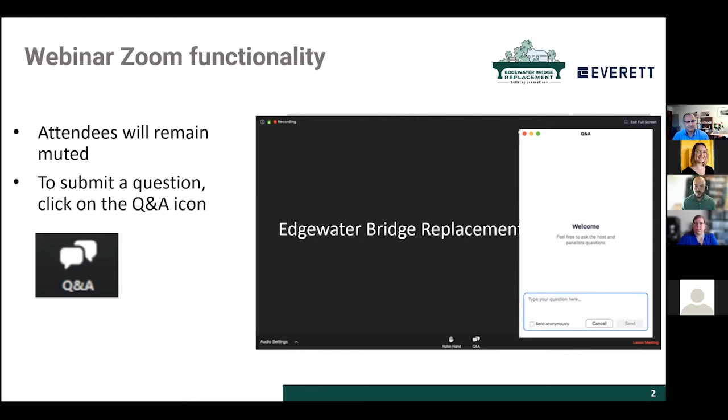In addition to these folks, we have a good number of project staff from either this project or from adjoining projects here with us who can answer questions.

The Edgewater Bridge project is a fairly elaborate project in and of itself, but it doesn't happen in a vacuum. There are other things happening along the Mukilteo Boulevard corridor, and this project is in coordination with them. We have folks from those teams, projects, and disciplines here to answer questions should they arise.

With that, I think we can turn it over to Gail to give us a project overview.

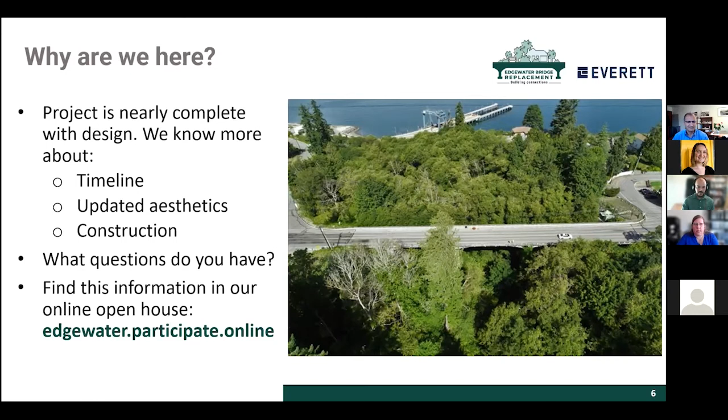The City of Everett is investing in our multimodal transportation by widening Edgewater Bridge to add bicycle lanes and more comfortable pedestrian sidewalks. The bridge is a vital link along Mukilteo Boulevard between the cities of Everett and Mukilteo.

Edgewater Bridge is one of 3 bridges along the boulevard within the City of Everett, all of which were recognized to have seismic vulnerabilities. The city is investing in this stretch of infrastructure to strengthen the corridor as well as mitigate any potential isolation during a major seismic event.

The Maple Heights Bridge seismic retrofit project was completed last year, and as funding becomes available, Merrill and Ring Creek Bridge will also be replaced.

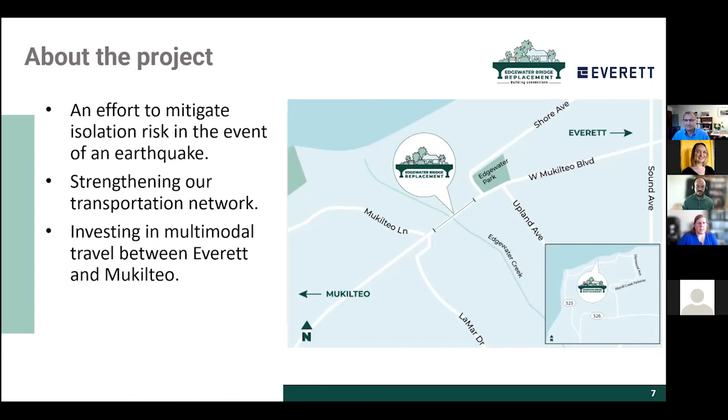Edgewater Bridge was built in 1946. Though it is considered safe, it has reached the end of its useful life. The bridge is posted for reduced weight restrictions, and as was mentioned previously, is vulnerable during a major seismic event. Most of you will agree the sidewalks are too narrow for comfortable walking, and there are no bicycle lanes.

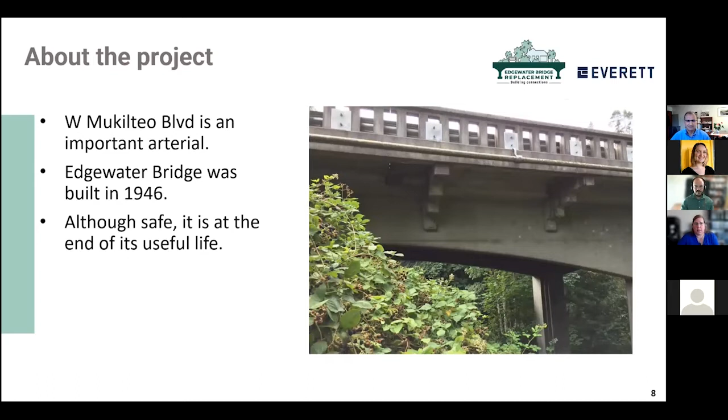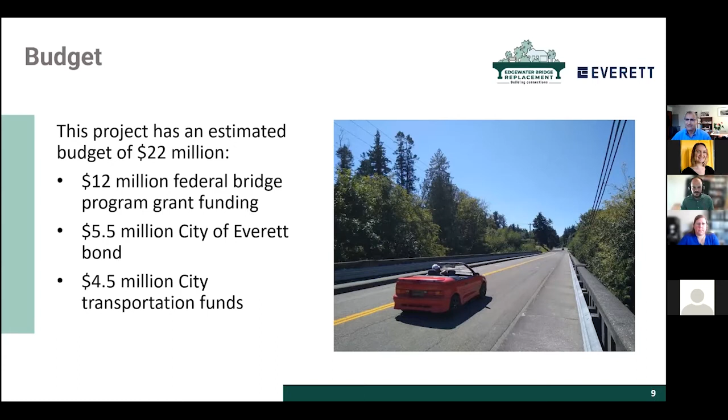And now I will hand this over to Cash. Thank you so much, Gail. Appreciate that. And good evening, everyone.

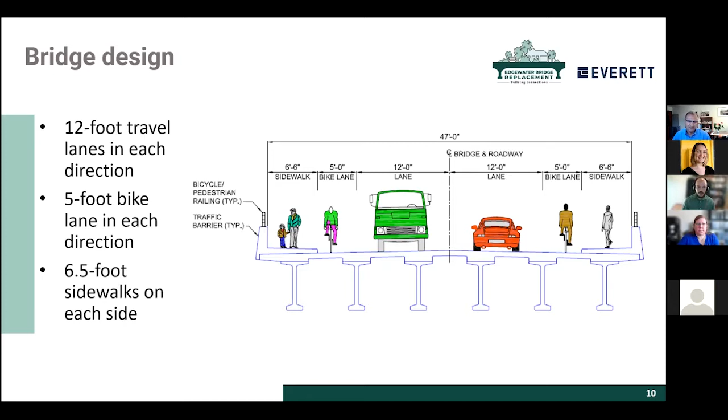The substructure of the bridge is composed of the main piers. Interior piers are founded on shafts and columns. The shafts of the interior piers are 10 foot wide and 10 foot in diameter, round shafts with 5 foot columns on top of them. The deep foundation for the abutments are composed of 6 foot shafts.

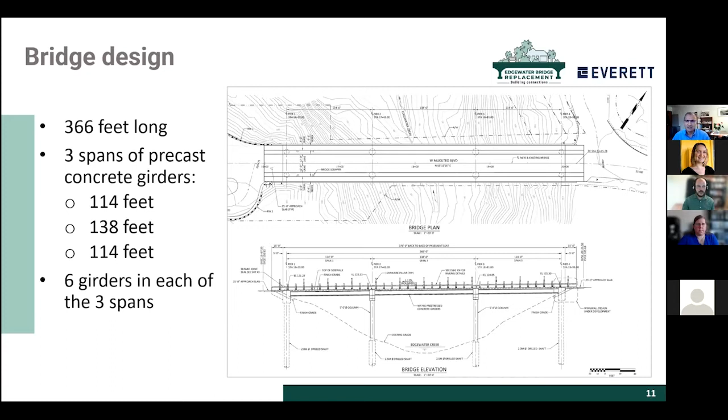Again, through an earlier outreach to the community, these functional aesthetic features were polled, and I will pass the baton to Nicholas to talk about more on that aspect of polling and public outreach.

Thanks, Kash. As Kash mentioned, we came out to the community about this time last year with a participate-online open house, asking for community input on what the aesthetics of the bridge could look like. There were 3 different designs, different styles of the railing, the luminaires or light poles, and the gateway features at both ends.

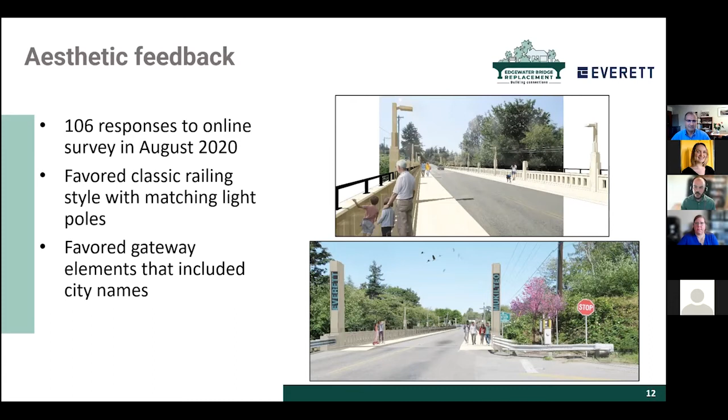I think now we will kick it back to Gail to talk about project timeline. Thanks, Nicholas. Since we last reached out a year ago, we have made great progress in the bridge design. We anticipate wrapping up design and submitting the project to WashDOT for their review late this fall.

Once we have permission, we will advertise and open bids early next year. After the contractor is on board and contracts are signed, construction should start in late spring. The bridge will remain open until school is out in June. Once closed, the road will remain closed for approximately 12 months. We anticipate the bridge will open summer of 2023 and the contractor will finish construction and demobilize.

Before the bridge contractor is on board, the city will begin a two-phase sewer project. The first phase may overlap the start of the bridge site work but will not interfere with the project. Once the bridge is finished, the second phase of the sewer project will remobilize and finish. This will be followed by construction of the newly designed Edgewater Park, completed in 2024. Next slide, please.

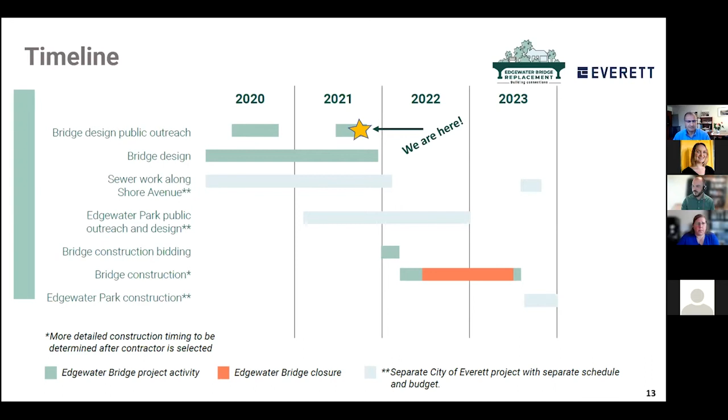Through design, we anticipate some basic details about construction, but we will know more about the contractor's means and methods once they are on board. Edgewater Bridge will be closed from mid-June 2022 for approximately 12 months with a pedestrian crossing path available. There is no economically feasible way to keep the bridge partially open while we rebuild it.

The west end of Edgewater Park will be used as a staging area, along with the intersections immediately adjacent on either side of the bridge. To provide access to the site and have room to operate the cranes and swing the girders into place, it will be necessary to remove trees and brush.

This will include the 5 trees at the corner of Shore Avenue and Mukilteo Boulevard. We will be following all guidelines established under the NEPA and SEPA permitting requirements, and we will be planting approximately 250 trees and a large variety of shrubs during the site restoration.

These replacement trees and shrubs are additional to the trees and shrubs that will be planted during the park redesign. There will be a need to have crew parking on both sides of the bridge since the work platforms adjacent to the bridge will not connect.

On the west side, crews will need to park along West Mukilteo Boulevard between Surlock Lane and the bridge work zone. Construction vehicles will use the portion of Lamar Drive that parallels Mukilteo Boulevard to enter and leave the work zone. We will also be realigning the east end of Lamar Drive, along with adding a retaining wall and installing new drainage.

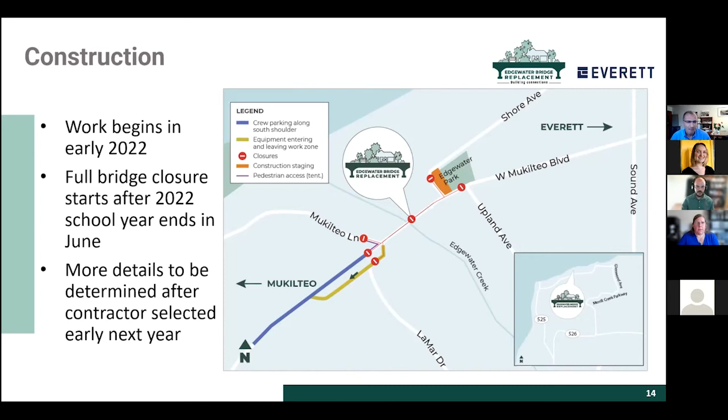Thank you, Gail. Now we would like to talk about the detour routes for the project. We analyzed travel times to provide estimates of the length of the detours for this project. During the morning and evening peak traffic hours, we expect drivers to have their route travel times extended by 5 to 15 minutes, depending on which route they are taking.

As we have demonstrated on this exhibit here, we'd like to mention that if we want to go from point 4 to point 5 on the exhibit, it'll take approximately 23 minutes through the detour. Please refer to the online open house for more detailed information on the general detour travel times. Next slide, please.

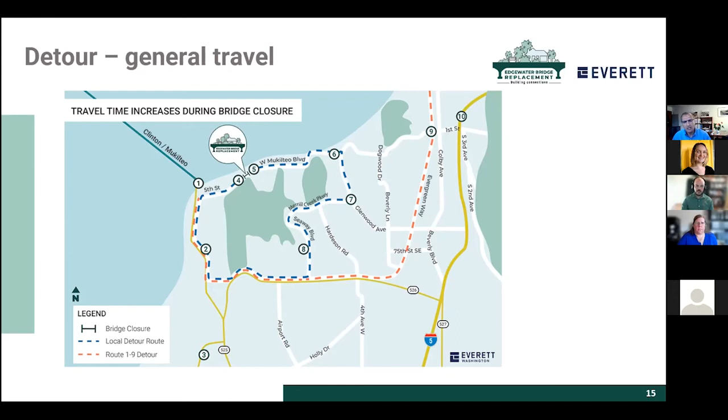Also, regarding the travel times to the schools, as far as school travel is concerned, we mapped the increased travel times for nearby schools. We found that the travel times will be increased by no more than 15 minutes with the routes shown here on the exhibit.

Furthermore, the city and the design team reached out to the school district. After our talks with the school district, we adjusted our construction schedule so that we do not close the bridge until the end of the 21-22 school year. The detour will be in place for the entire 22-23 school year.

Again, please visit our online open house for more detailed information regarding any travel time during this detour phase of the project. Next slide, please.

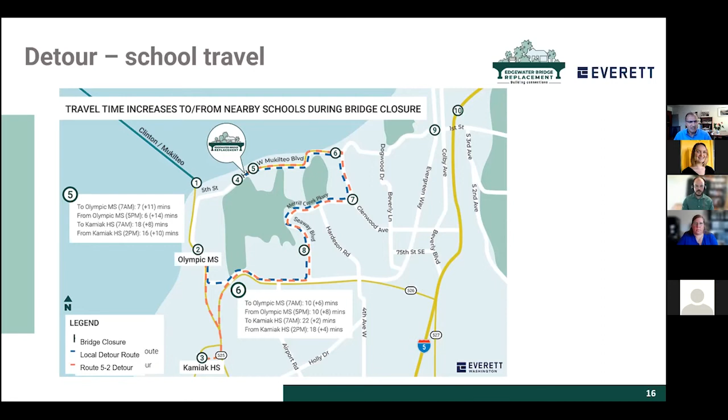Now I will pass the baton back to Gail. Thanks, Cash. As noted in the timeline, there are several other projects in the vicinity of the bridge. The first project will relocate an aged sewer pipeline system located along Edgewater Creek. This project includes installing a new pipe along Shore Avenue and a lift station.

Phase 1 of the sewer project, installation of the force main pipe, as well as the relocation and installation of needed equipment, begins before the bridge project starts. Installation of the force main pipe may overlap the start of the bridge site work, but trenching is anticipated to be further down Shore Ave and will not interfere with the bridge project.

Installation of the permanent pumps and electrical system to complete the project will occur in phase 2. The equipment shown in the picture will remain in place once phase 2 is completed.

The City of Everett's Parks Department is using the partial closure of the park as an opportunity to undertake a new park design. We don't have a timeline for the public outreach or construction for that project at this time.

The City of Mukilteo also has upgrades planned for 5th Street, otherwise known as Mukilteo Boulevard, to improve bicycle and pedestrian safety along the corridor. They also have an online open house, which will remain open until September 8th.

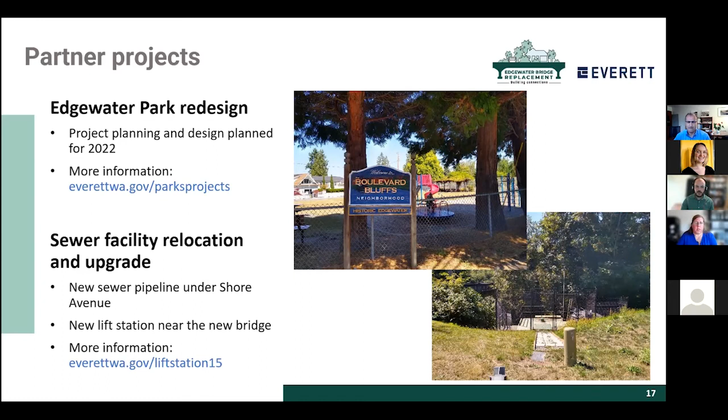The next steps visible to the public will start in spring of 2022, when the contractor begins to mobilize and start some of the necessary site work that will take place before the bridge closure. Once we get close to the start of construction, we will send notifications out. As we approach the bridge closure, we will again send notifications out along with advance warning signs being installed.

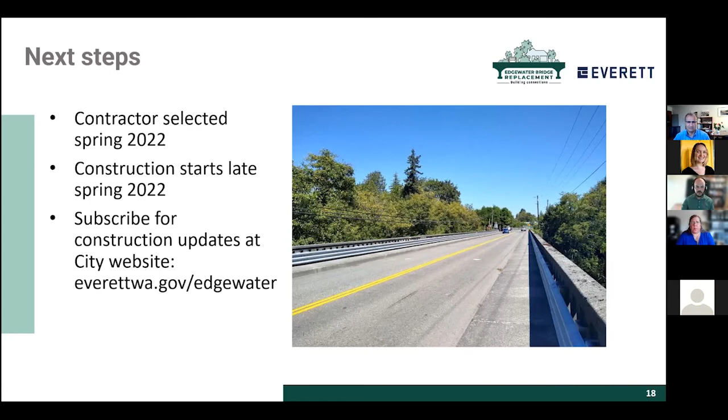Expect the bridge closure to begin once school is out for the 2021-2022 school year next June. Now I'm going to hand this over to Nicholas to help facilitate questions. Thanks, Gail. Yep, so that is an overview of where we're at with the project.

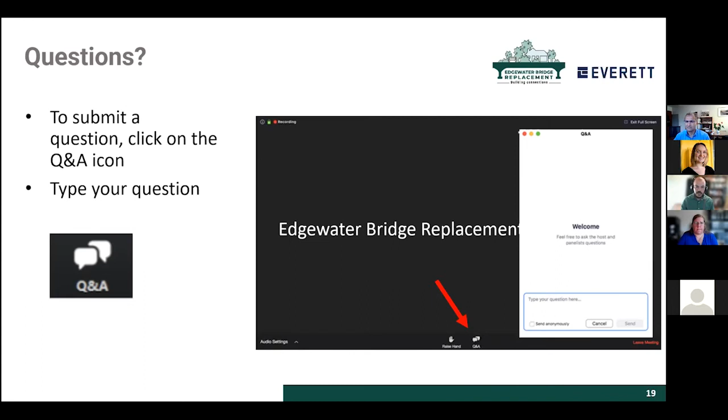As a couple of people have mentioned, we have an online open house running right now, which you can find here on the right at edgewater.participate.online. It has more in-depth information about the project. If you have a certain route you travel frequently and you're wondering about your increase in travel time, we have tables on that website showing what you might expect from that detour.

Gail, we do have one question for you. Someone notes the many pedestrians that cross the bridge daily and is wondering, would it be possible to build a temporary trail down to the creek and up the other side? Many people walk over the bridge to the beach area daily, and there's an old trail there that could be extended to the other side to facilitate pedestrian crossing during the closure.

There will be no pedestrian access from one side of the project to the other. Due to safety concerns, the city will not be providing a path down the ravine. We tentatively plan to provide access along the closed portion of Mukilteo Boulevard and Mukilteo Lane on the Mukilteo side, to allow pedestrians and bicyclists to access Mount Baker Crossing. But again, for safety reasons, we will not be providing or upgrading a trail through the ravine.

We have another question about budget. As you mentioned, the project is currently on budget, but should there be cost overruns, where would those costs come from? Where would that extra money come from?